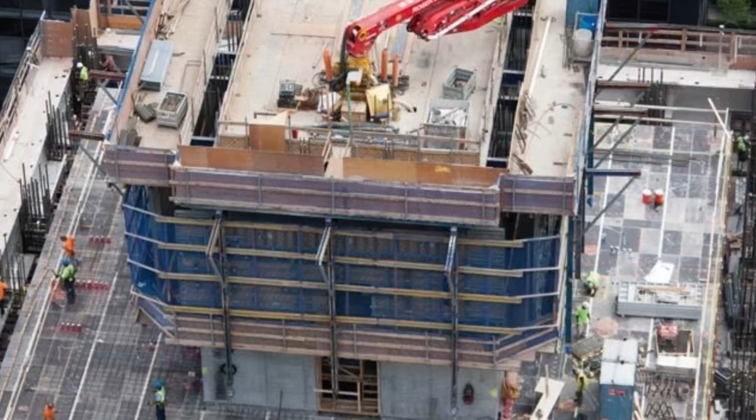Right now, more than 1,000 feet above 57th Street in Manhattan, there is a crack. Not a hairline, not the kind of cosmetic fracture that every concrete building develops as it settles into its first decade. According to a lawsuit filed in the New York State Supreme Court, there is a crack 10 inches deep inside the reinforced concrete core of the tallest residential building in the Western Hemisphere.

10 inches into the structural spine of the most expensive condominium ever built in New York City. A building that cost more than $3 billion. A building marketed as the building of the 21st century. A building where a single penthouse sold for nearly $88 million. And according to the people who live there, that building is failing from the inside out. This is the story of 432 Park Avenue.

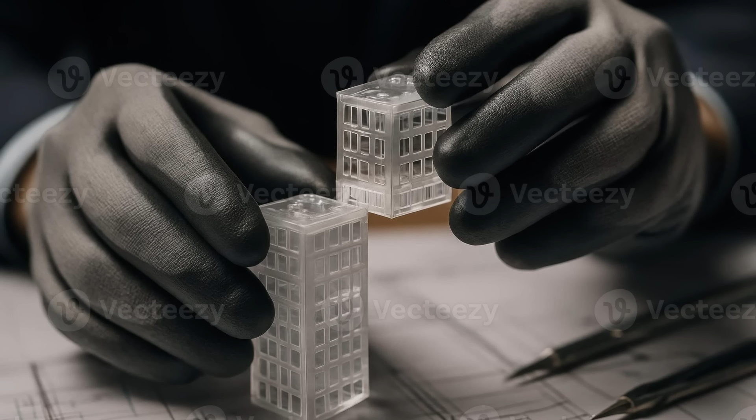It is a story about physics and money and ambition and the specific decisions that get made when a developer wants a building to look a certain way and the engineers tell him it cannot safely be built that way. It is a story with a dead architect, a foreclosed developer, a Saudi billionaire who has never spent a single night in the penthouse he bought, and a condo board that is now accusing the people who built their building of what their attorneys call a deliberate and far-reaching fraud.

It is a long story, and I'm going to tell you all of it, because the short version that has been circulating does not do justice to how this happened or to how many warnings were ignored along the way. Let me start with the ambition, because you cannot understand the failure without understanding what they were trying to do.

In 2011, a New York real estate developer named Harry Macklowe stood up at a global real estate conference and announced that he was going to build a monument. Macklowe is a legend in New York development. He is an old-school operator who takes enormous swings and does not deal in small gestures. His words, by multiple accounts, were that this would be the building of the 21st century, the way the Empire State Building was the building of the 20th. He was not selling apartments, he was selling a place in history.

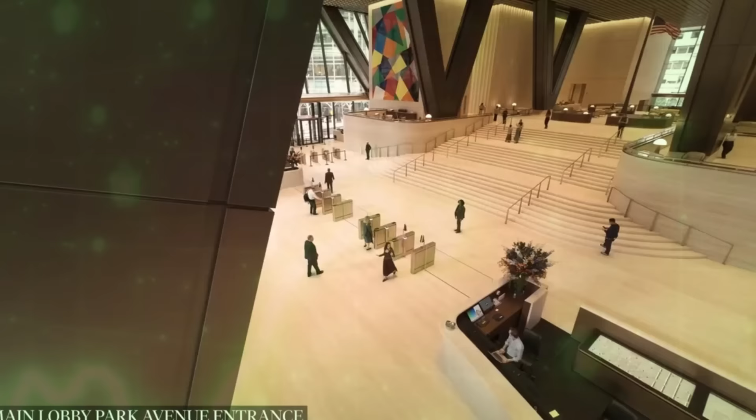The site was the old Drake Hotel on Park Avenue, which Macklowe had acquired in 2006 for around $413 million. To build his monument, he partnered with a Los Angeles-based investment firm called CIM Group, which had stepped in years earlier to help rescue Macklowe's position on the site.

And to design it, he hired one of the most celebrated architects alive, Rafael Viñoly, the Uruguayan-born designer behind the Tokyo International Forum and a string of internationally recognized buildings. The structural engineering went to WSP, the firm that helped invent the modern super tall skyscraper. On paper, this was the best team money could assemble.

The design Viñoly produced was famously inspired by a trash can, specifically a 1905 wastebasket designed by the Austrian designer Josef Hoffmann, which Viñoly reportedly kept on his desk. A perfect square grid, clean and repeating, scaled up into a tower. The most expensive residential building in the Western Hemisphere was modeled on a receptacle for garbage.

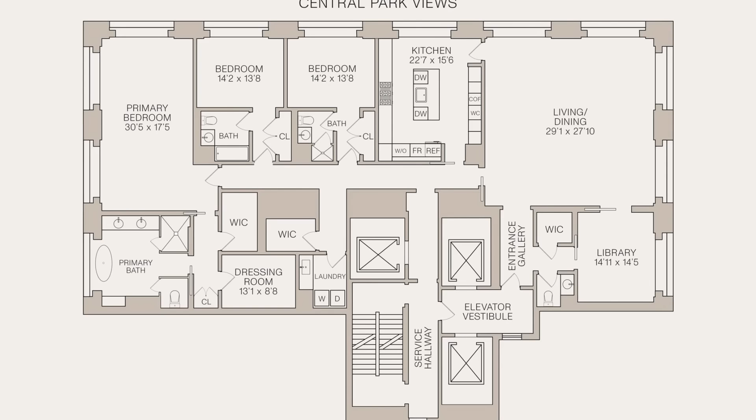I am not editorializing when I say that. It is in the public record of how the building was designed. And I personally think it is one of those details that seems like a small irony at the start of a story and then grows heavier as the story goes on.

Here is what they set out to build. A tower 1,396 feet tall, 96 stories, a footprint that is a perfect square, roughly 93 feet on each side. That produces a height-to-width ratio of about 15:1. I want you to sit with that number because it is the root of everything that follows.

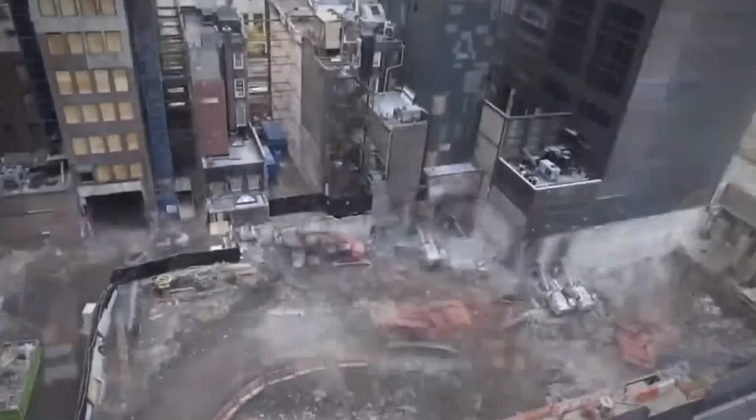Engineers classify a building as wind-sensitive when its height-to-width ratio crosses 5:1. 432 Park Avenue was designed at 3 times that threshold. When it topped out, it was the most slender super tall building on the planet. Picture a number 2 pencil balanced on its eraser, and then picture the wind blowing across the top of it. That is the physics problem the engineers were handed.

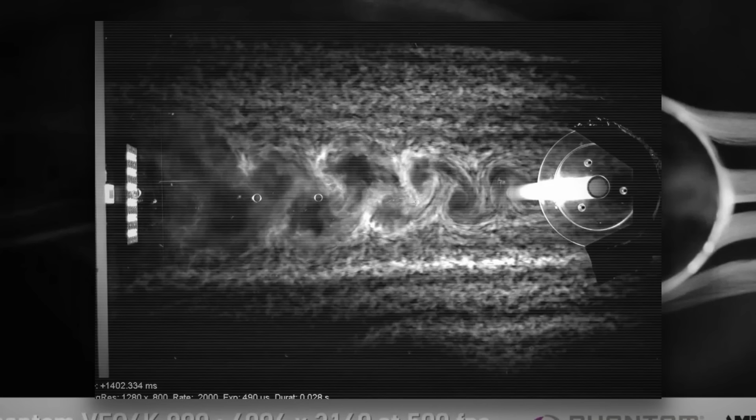The specific danger in a tower that's slender is not simply that the wind pushes it. It is a phenomenon called vortex shedding. When wind flows around a tall, slender structure, it does not just press against the face of the building and stop, it curls. It peels off the sides in alternating spinning eddies, first off one side, then the other, in a repeating rhythm. Engineers call that pattern a vortex street.

And here's the dangerous part. If the rhythm of that vortex shedding happens to match the natural frequency at which the building wants to sway, the two reinforce each other, and the tower begins to oscillate sideways, perpendicular to the wind, in a feedback loop that can grow far beyond what the raw wind speed would suggest.

The taller and thinner the building, the worse this problem becomes. For an office tower, some sway is tolerable because the workers go home at 6 o'clock. For a residential building, where people are trying to sleep, where they are trying to fill a bathtub, where they expect their doors to close, sway is a far bigger problem.

So Viñoly and WSP built a layered defense against the wind, and I want to walk through it, because the sophistication of the engineering is part of what makes the later failures so striking. First, they cut 5 open mechanical floors into the tower, each one spanning 2 stories, spaced roughly every 12 floors up the height of the building. These are the dark open gaps you can see from the street.

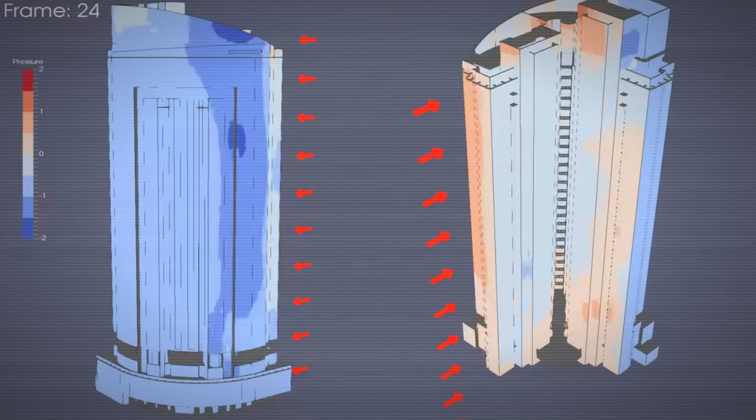The idea is that wind blows straight through those openings, like punching holes in the sail of a boat, disrupting the organized vortex street before it can build into a destructive rhythm. Second, at each of those mechanical levels, they installed outrigger trusses spanning 2 full stories, tying the central concrete core to the perimeter columns to stiffen the whole structure. Third, they wrapped the entire tower in a grid of white concrete columns, a kind of exoskeleton, spaced at regular intervals up the full height.

Fourth, they anchored the foundation with around 60 rock anchors driven 60 to 70 feet down into Manhattan bedrock. And fifth, at the very top, between floors 86 and 89, they installed 2 enormous tuned mass dampers, each weighing roughly 660 tons, designed to swing in opposition to the building's motion and cancel it out.

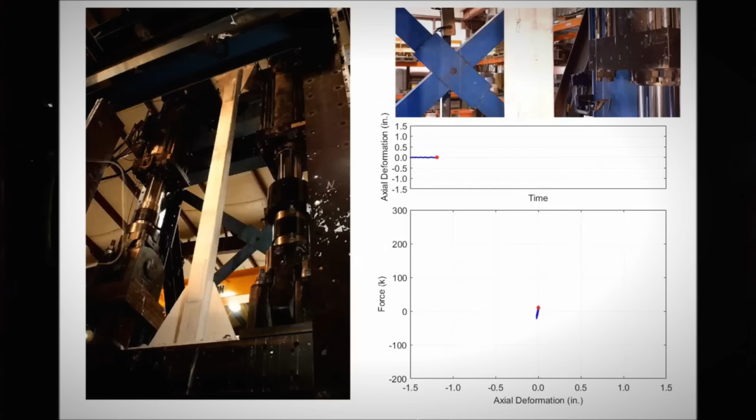At the center of all of it, holding the entire system together, is a 30-foot square reinforced concrete core, with walls roughly 30 inches thick at the base. That core is the spine of the building. It carries the wind loads. It resists the lateral forces. It is the single element in the entire structure that you cannot afford to compromise. Because if the spine fails, every other system fails with it. And that spine, according to the April 2025 lawsuit, is exactly where the 10-inch crack is now located.

The materials were as extreme as the geometry. According to the engineering record, the project used around 70,000 cubic yards of concrete and 12,500 tons of reinforcing steel. The lower 38 stories were poured with concrete rated at 14,000 pounds per square inch, roughly twice the strength of a typical high-rise mix, strong enough in engineering terms to support a small mountain.

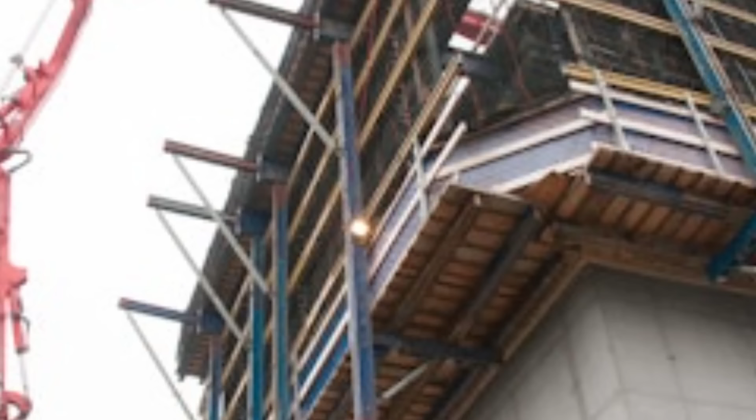And for the exterior, the team developed a specialized white Portland cement, chosen specifically for its color, for the way it would stand out clean and pale against the glass towers of Midtown. The structural engineers would later describe producing that high-strength, pumpable white concrete, capable of being pushed up nearly 1,400 feet without separating or discoloring, as one of the most demanding challenges of the entire project.

And this is where I have to pause, because this is the hinge of the entire story. The white concrete was the signature. It was the brand. It was the thing that made 432 Park look like 432 Park. And according to the lawsuit, protecting that white concrete, keeping it pure and visible, drove a series of decisions that the residents now say doomed the building.

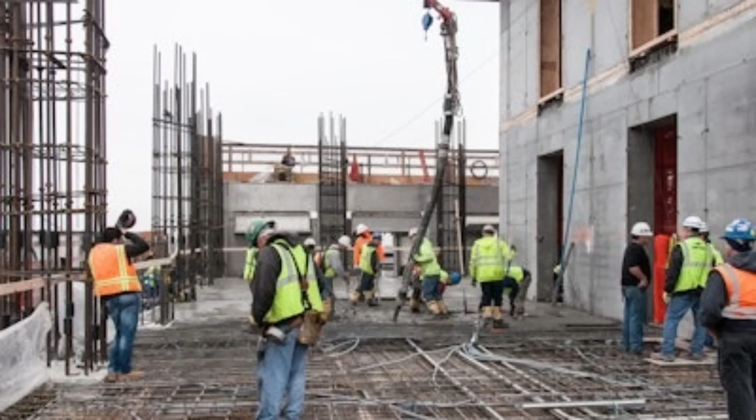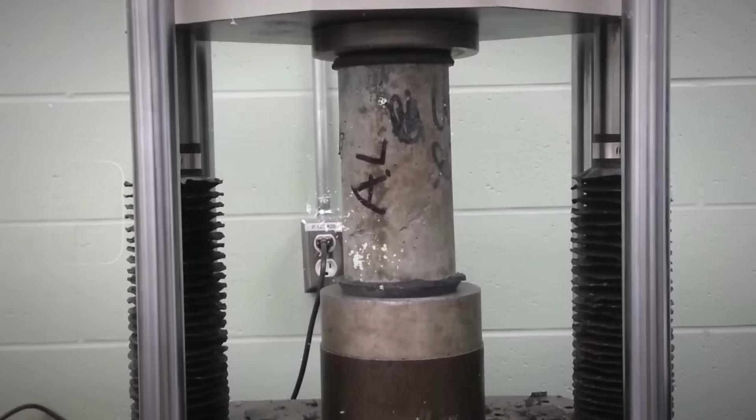But let me keep building the timeline first, because the warnings, according to the complaint, started before they poured a single floor. Construction began in earnest on the Drake Hotel site around 2012. The main contractor was Lend-Lease. The challenge they faced had genuinely never been solved at this scale. How do you pour tens of thousands of cubic yards of specialized white concrete into a 1,396-foot tower on a cramped Manhattan lot on a tight schedule while keeping the color consistent and the strength intact all the way up?

The answer was a self-climbing concrete core system, a pouring apparatus with a placing boom and a crane that hydraulically lifted itself about 16 feet at a time as each floor was completed. Floor by floor, the tower rose at what observers at the time described as unusual speed.

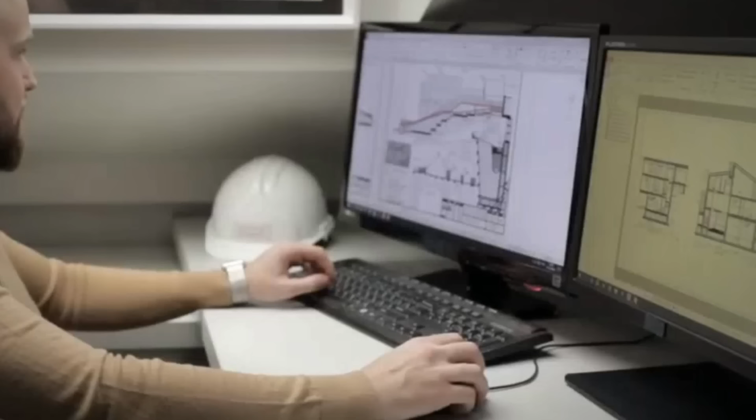According to the 2025 complaint, the problem with the beautiful white concrete was durability. The engineers, the lawsuit says, wanted to add a standard ingredient called fly ash to the concrete mix. Fly ash makes concrete significantly more durable and more resistant to cracking over time. It is not exotic.

It is used in concrete construction across the world. But fly ash, according to the complaint, would have made the concrete slightly darker. It would have compromised the pure white color that was the building's entire aesthetic identity. And so, the lawsuit alleges, the request to add fly ash was refused.

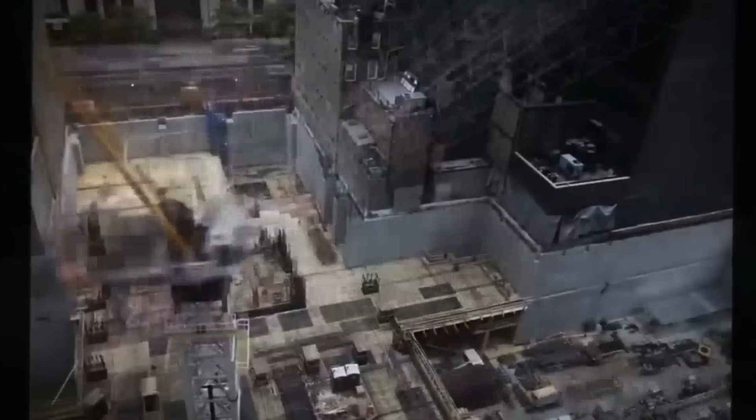The competitor coverage of this story has circulated a quote attributed to a structural engineer summarizing the choice in 3 words: color or cracks. I want to be careful here because I have not been able to independently verify that specific internal email in the primary court record available to me. So I am presenting it as what has been reported and alleged, not as established fact. But the broader allegation that durability was traded for appearance is at the center of the lawsuit the condo board actually filed. The engineers, according to the complaint, then proposed a backup plan.

If they could not put fly ash in the concrete, they could coat the exterior with a thick, flexible elastomeric membrane, a waterproofing layer designed to seal any cracks that developed and block water from reaching the steel reinforcement inside the concrete. And here's the allegation that has become the headline of this entire story. According to the lawsuit, the developer rejected the elastomeric coating because an opaque coating would alter the appearance of the white concrete and reduce the building's appeal to the world's wealthiest buyers.

Instead, according to the complaint, the facade received a clear silicone sealant, the same kind of material the lawsuit alleges was used to protect the hull of a yacht, a clear coating, so the white concrete could still show through. The look of the building, the complaint argues, was chosen over the protection of the building. I personally think this is the decision the entire case turns on if the allegations hold up in court, because everything downstream flows from water getting into concrete that was not adequately protected against it.

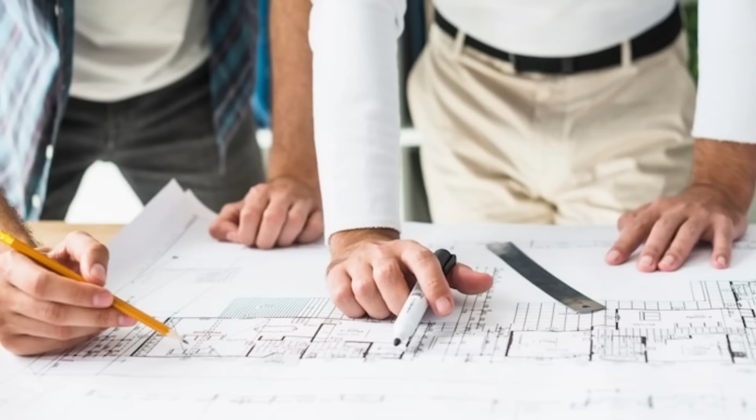And I want to be precise about something the careful coverage of this story gets right and the sloppy coverage gets wrong. There are actually 2 separate problems here. One is the cracking of the exterior white concrete facade, which is what the fly ash and the coating decisions were about. The other is the 10-inch crack later alleged in the building's structural core, which is a deeper and more serious matter. Both are real allegations in the case. Only the facade cracking was, according to the complaint, the subject of warnings before construction. I'm not going to blur those 2 together the way some retellings have, because the distinction matters.

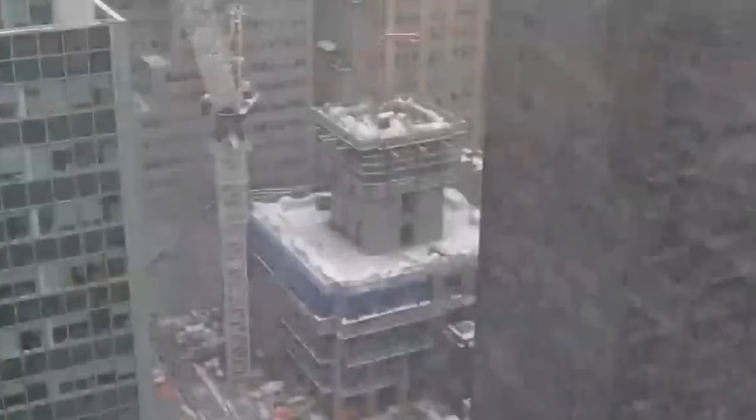The tower topped out in October of 2014. It was certified complete in December of 2015. The first residents began moving in almost immediately, and almost immediately, according to the residents, the building began telling a very different story than the one in the marketing. And the marketing, I should say, was extraordinary. Macklowe reportedly spent around $1 million to commission a 4-minute promotional film from an Emmy-recognized production company.

The centerpiece of the film was Philippe Petit, the high-wire artist famous for walking a tightrope between the Twin Towers in 1974, now depicted walking a virtual wire from the Empire State Building directly to 432 Park Avenue. The torch symbolically being passed from the building of the 20th century to the building of the 21st. It was abstract, it was artful, and by every financial measure, it worked.

By 2014, before construction was even finished, half the units had sold for a combined $1 billion. By 2015, the building was 90% sold. The cheapest unit in the entire tower still cost more than $1 million. 432 Park became briefly the first condominium building in New York City history to cross $2 billion in sales. The projected total sellout was $3.1 billion, and by the developer's own reported accounting, the partnership cleared somewhere around $900 million in profit. The buyers were exactly who you would expect.

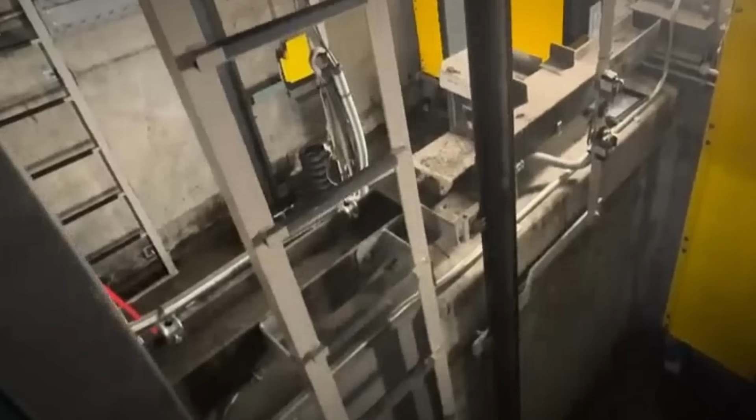Because the failures, when they came, came fast. The first sales had barely closed when the water started. On November 5th, 2017, according to the record, a catastrophic flood tore through the building between the 83rd and the 86th floors. A buyer named Juan Beckmann Vidal, the chairman of the company behind the Jose Cuervo tequila brand and a member of one of Mexico's wealthiest families, had been in contract for an apartment priced at $46.25 million on the 86th floor. After the flooding, he sued to get his deposit back. That dispute was reportedly settled quietly about a year later.

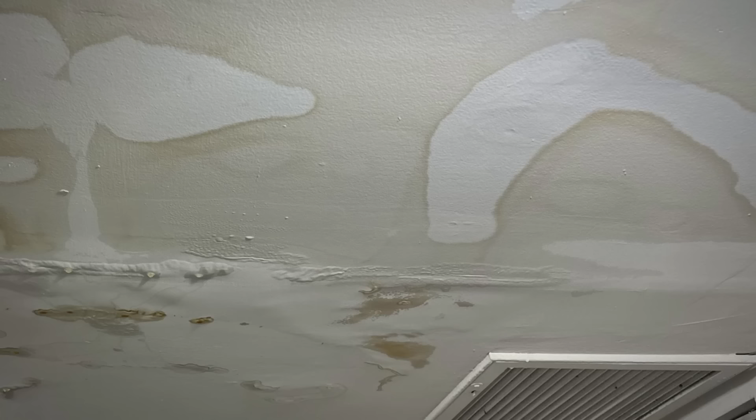The leaks did not stop. In late November 2018, 2 major water failures happened within 4 days of each other. A flange burst on the 60th floor on November 22nd, and a water line failed on the 74th floor on November 26th. Water poured down 2 of the 4 residential elevator shafts. According to the record, total water damage in 2018 alone reached $9.7 million. 35 apartments were damaged by leaks. An elevator was out of service for weeks. And the building's insurance premiums, according to the residents, rose 300% over 2 years.

By 2019, the residents were holding owners' meetings, and the minutes from those meetings began to read like dispatches from a haunted ship. Creaking, banging, clicking, metal partitions groaning as the building moved in the wind, a whistle in the door frames and the elevator shafts, which residents described as constant. Pipes inside the walls, according to the complaints, vibrated so violently when the tower swayed that bathtubs became effectively unusable because the water would not sit still.

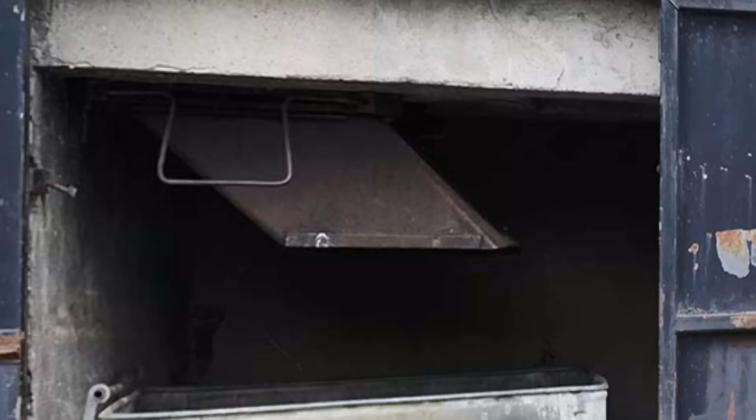And then there is the detail that, more than any other, captured the public imagination. The trash chute. 432 Park Avenue's garbage chute is a straight vertical drop of roughly 1,300 feet, with no brakes and no offsets to slow anything down. When a resident on a high floor drops a bag of trash into it, that bag accelerates the entire way down. And by the time it reaches the bottom, it is moving at something approaching terminal velocity.

According to the board meeting minutes, residents reported the impact vibrating through the walls of their bedrooms, a sound they described as a bomb going off inside the building, on a schedule, every single time someone took out the garbage. Imagine paying $20 million for an apartment in the most exclusive tower in New York and being woken by what sounds like an explosion every time a neighbor throws away a milk carton.

Then came Halloween night, October 31st, 2019. The wind picked up over Manhattan. A resident stepped into one of the building's residential elevators. The system, as it is designed to do in high wind, slowed the car, and then it stopped. That resident sat trapped inside the elevator car, somewhere in the sky above 57th Street, for 1 hour and 25 minutes. The cause, according to reporting, traced back to the building's movement in the wind exceeding what the elevator system could comfortably absorb.

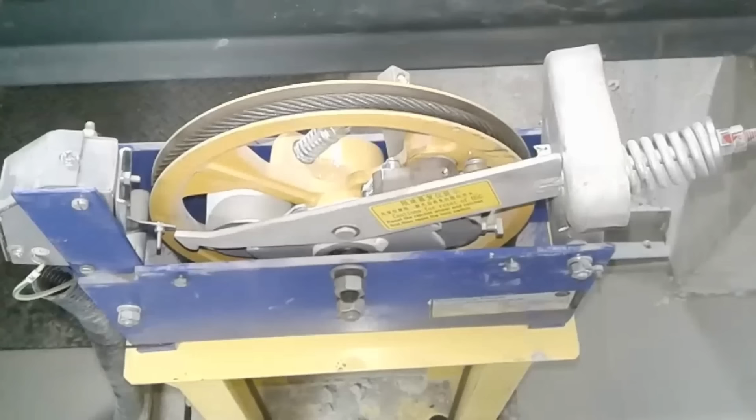In June of 2021, there was an electrical explosion, an arc flash in a mechanical room. According to reporting, a contractor working on a leak had drilled into live wiring and was thrown by the blast. It was, by the residents' account, the second such explosion in 3 years.

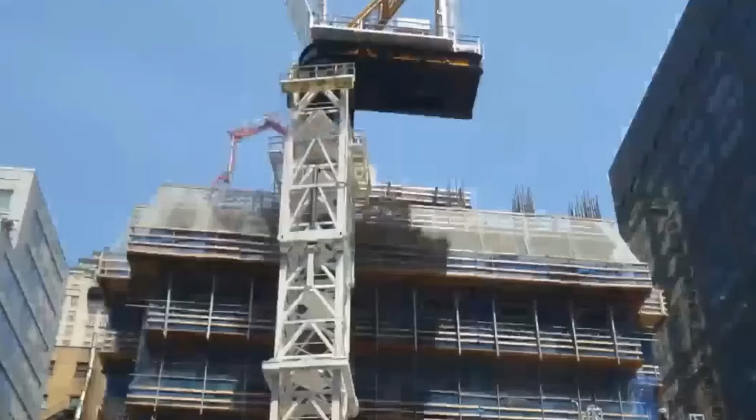The complaint included a line that has been widely quoted that the situation represented one of the worst examples of sponsor malfeasance in the development of a luxury condominium in the history of New York City. According to the residents, the chairman of CIM Group had even privately acknowledged that the noise and vibration inside the tower were, in his word, intolerable.

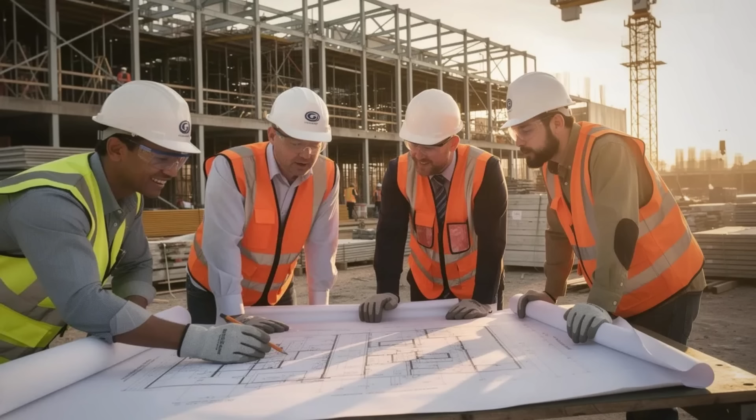The developers rejected the lawsuit forcefully. They called it ill-advised. They described 432 Park as a treasure and characterized the building as containing a sophisticated symphony of systems that simply needed fine-tuning as residents settled in. They said they had attempted to do further work but had been denied access to the building by the board. And notably, the developers argued that the lawsuit was not even supported by all the residents.

Macklowe himself reportedly described the board's lawsuit as a scorpion biting its own back because, in his view, publicizing the building's problems was destroying the value of the very units the residents were trying to protect. That first lawsuit did not resolve cleanly. It ground forward through the courts for years. By 2024, according to public reporting, it had produced more than 4 million pages of documents and dozens of days of deposition testimony.

The fight became a finger-pointing exercise among the developer, the general contractor Lendlease, the engineering firm, the architect, and the various subcontractors, each pointing at the others, with the sponsor's liability shielded behind the limited liability company structure that developers use precisely for situations like this.

And while that litigation dragged on, the developer's own personal fortunes inside the building collapsed in a way that reads almost like a parable. In 2022, Harry Macklowe purchased 3 units in his own building, on the 78th and 28th floors, for around $47 million. The financing for that purchase, according to reporting, came in the form of more than $46 million in loans from his own co-developer, CIM Group.

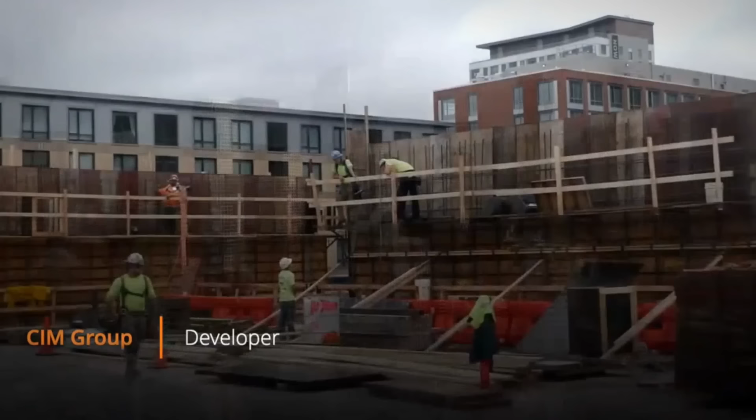In March of 2023, Rafael Viñoly died. He was 78 years old. He died before the second and far more serious lawsuit was filed, which means the architect of the building never had to answer in a courtroom for any of what came out afterward. I want to note, because it is fair to note, that Viñoly's defenders point out that many of the most damaging decisions alleged in the case were developer decisions, not architect decisions, and that the tension between Viñoly and Macklowe over design choices was well documented while the architect was alive.

Viñoly was also no stranger to signature buildings producing unintended consequences. His Walkie-Talkie tower in London, with its concave glass facade, focused sunlight intensely enough to damage cars parked on the street below, and channeled wind strong enough to knock pedestrians off their feet. He publicly acknowledged that his team had made mistakes on that project. The pattern, his critics argue, was consistent. A bold signature shape is chosen, physics objects, and eventually the people using the building pay the price.

Then, in April of 2025, the condo board filed its second lawsuit. And this one was bigger, and the language was far heavier. The 2025 complaint runs 46 pages. It seeks $165 million in damages, and it uses a phrase the first lawsuit did not: deliberate and far-reaching fraud. The core allegation of the second lawsuit is not merely that the building was poorly built, it is that the developers knew it was defective and concealed that knowledge in order to keep selling units at top prices.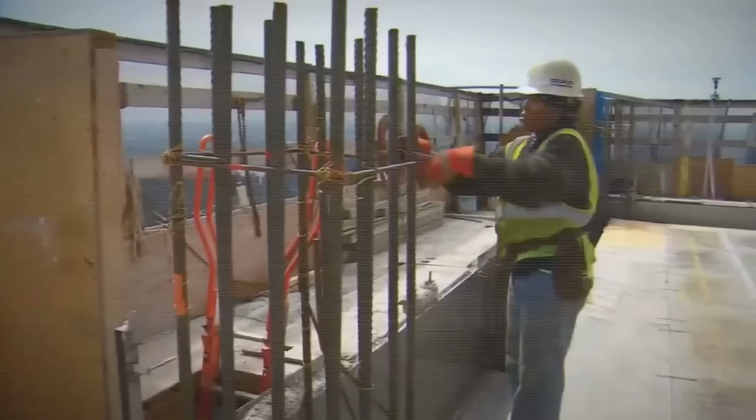According to the complaint, a facade survey conducted in 2016, while the building was still actively being sold, identified 1,893 defects in the exterior, more than half of which were classified as life safety items. That report, the lawsuit alleges, was concealed from buyers who were signing contracts at the same time.

The complaint goes further. According to CNN's reporting on the filing, the lawsuit alleges that the architecture firm SLCE made materially false claims in the building's offering plan, the legal disclosure document that buyers review before purchasing. The complaint cites a specific change in the document's wording. Language that originally stated the concrete will prevent water penetration was allegedly changed to say it was designed to prevent water penetration.

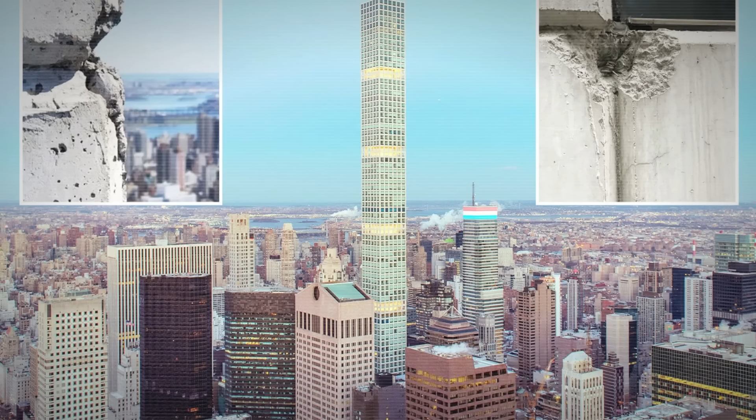One word, will, changed to "designed to." In legal terms, the lawsuit argues that is the difference between a guarantee and a hope, and the change was allegedly made because the developers already knew the facade could not deliver the guarantee.

The complaint also alleges that the contractor and the engineering firm sent a letter to the New York City Department of Buildings that misrepresented the nature, extent, and type of the cracking, allegedly omitting the most damaging findings of their own internal survey, while people were still buying and moving into the building. And at the center of all of it is the 10-inch crack.

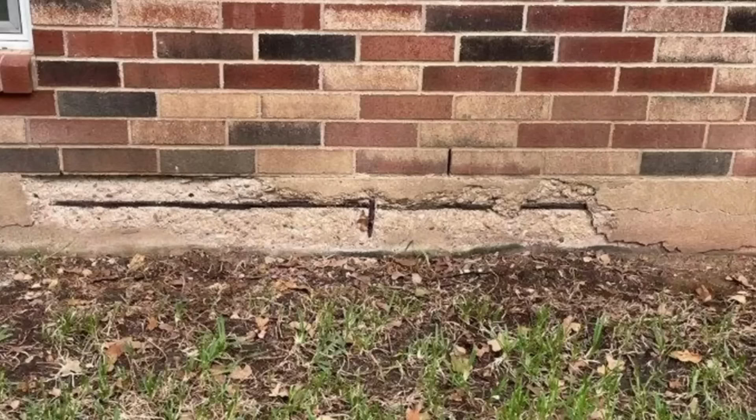According to the 2025 complaint, the facade's defective design left it plagued with thousands of severe cracks, spalling, and deterioration, which led to major water infiltration and flooding, and, critically, to corrosion of the steel rebar reinforcing the concrete columns. I read you the exact substance of that allegation because it is the heart of the structural concern.

When water reaches the steel reinforcement inside concrete, the steel begins to rust. When steel rusts, it expands, sometimes to several times its original volume. That expansion cracks the surrounding concrete from the inside out. The new cracks admit more water. The additional water corrodes more steel. The process feeds on itself, and it does not stabilize, and it does not reverse on its own.

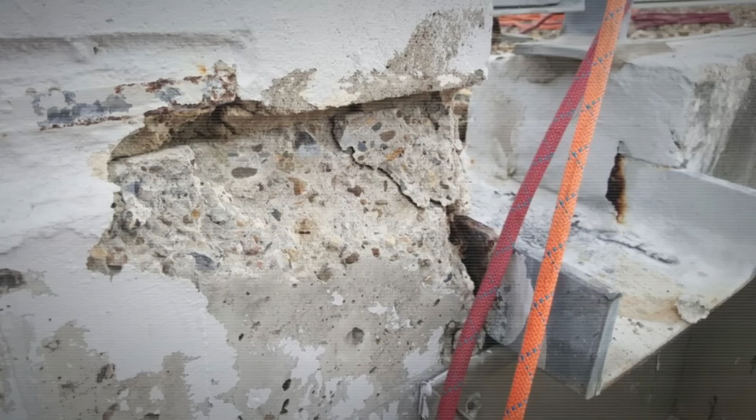The complaint alleges that this process is now underway inside the structural columns of the building, and that somewhere inside the core, the spine that holds the entire 1,396-foot tower upright against the wind, there is a crack 10 inches deep. The developers deny all of it.

CIM Group, in a statement to multiple outlets, said it vehemently denies the claim and will be moving to dismiss the complaint. The developers have previously characterized the residents' allegations as exaggerated. As of the most recent public record, the case is pending, it has not been ruled on, and these allegations have not been tested in court.

I want to be completely clear about that because it matters. This is a lawsuit, not a verdict. What I have described is what the condo board alleges, supported by the survey documents and the offering plan language their attorneys have cited. The other side is entitled to its defense, and it has stated its defense plainly.

Now, I want to turn to the part of this story that I think gets too little attention, which is what it has actually been like to live there, and what the money has done. In 2021, the New York Times reporter Stefanos Chen broke the definitive account of the residents' experience.

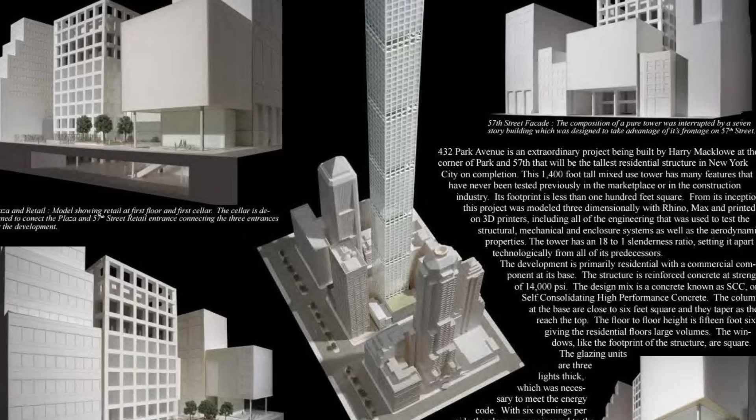A woman named Sarina Abramovich, who had paid $17 million for her unit in 2016, told him that she had been convinced it would be the best building in New York, that the developers were still billing it as a gift to the world, and that it was not. She told him that everybody in the building hated each other. She told him that if she had known then what she knew now, she would never have bought.

And she said one sentence that I think captures the entire story better than any engineering report could. Everything here, she said, was camouflage. The financial wreckage tells the same story in numbers. Thomas Peterffy sold his 84th floor unit in 2024 for $13.5 million, a substantial loss on what he had paid.

A unit on the 79th floor, originally listed at $135 million, was cut to $92 million in 2023 and finally sold that October for $65.6 million, less than half its original asking price. And the penthouse, the $87.7 million trophy on the 96th floor that Fawaz Al-Hokair bought in 2016 and reportedly never spent a night in, became the symbol of the whole collapse.

He listed it in 2021 for $169 million, aiming to nearly double his money in the post-pandemic luxury boom and set a city record. It did not sell. He cut it to $130 million in 2023. He cut it again to $105 million in 2024.

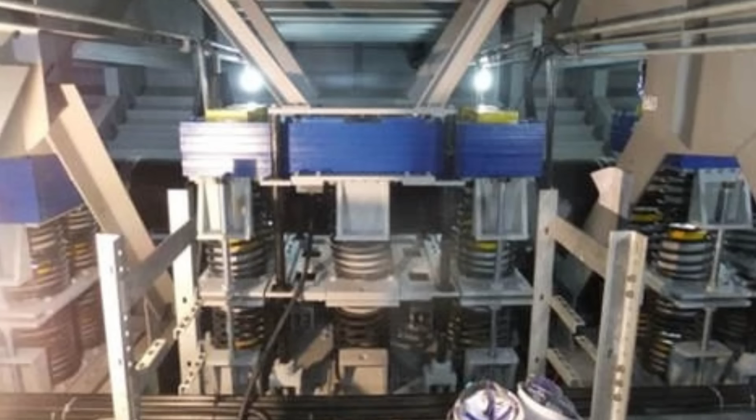According to estimates cited in the reporting, refurbishing the two 660-ton tuned mass dampers at the top of the tower, the counterweights that are the only thing keeping the building's sway within livable limits, could cost on the order of $100 million on its own. The facade remediation has been estimated in similar territory.

For a building not yet 10 years old, the repair bills run into the hundreds of millions of dollars on top of the litigation, which reportedly consumes millions of dollars a year in legal fees on its own.

There is a building in downtown San Francisco where, if you set a marble down on the floor of certain apartments, it will roll on its own. Not because the floor was built wrong, but because the entire building is tilting. The Millennium Tower at 301 Mission Street is 645 feet tall, 58 stories, and home to 419 luxury condominiums that once sold for as much as $10 million each. It opened in 2009 as the most prestigious residential address in the city.

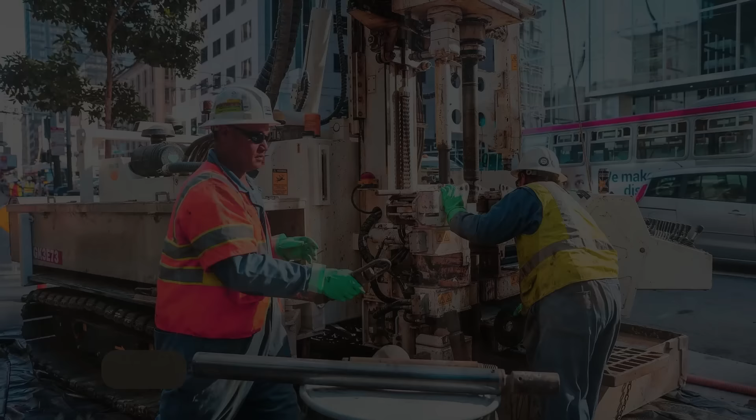And almost from the moment it opened, it began sinking into the ground beneath it and leaning slowly and relentlessly toward the northwest. As of the most recent monitoring data, the top of the tower leans about 29 inches off true. A $120 million engineering rescue was supposed to stop the sinking and pull the building back towards straight. The sinking, by the engineers' own account, has finally been arrested, but the tilt that the same engineers predicted they would correct by 4 inches has so far come back by about 1 inch.

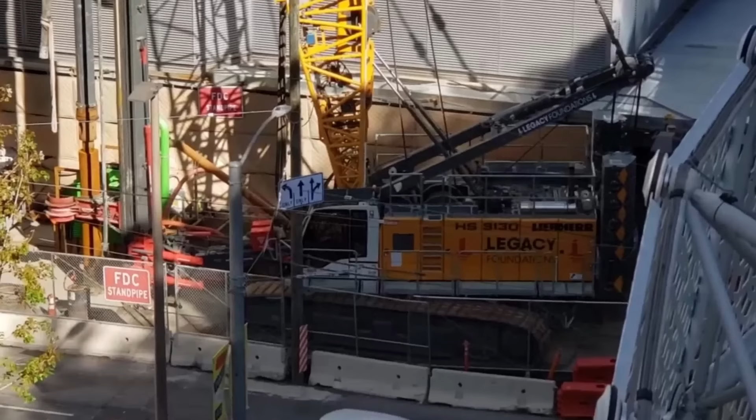This is the story of how the most expensive residential tower San Francisco had ever built became the city's most expensive engineering embarrassment. How a foundation decision made to save time and money in 2005 produced a problem that could not be undone, and how the fix for that problem ran into trouble of its own. It is a story about the ground we build on, about what engineers can and cannot predict, and about the gap between a building that is technically safe and a building that anyone actually wants to live in.

This is document number 1. The Millennium Tower file is open. To understand what happened to this building, you have to understand what is underneath it, because the entire story begins below the street. 301 Mission Street sits in San Francisco's South of Market District on land that 2 centuries ago was part of the bay itself.

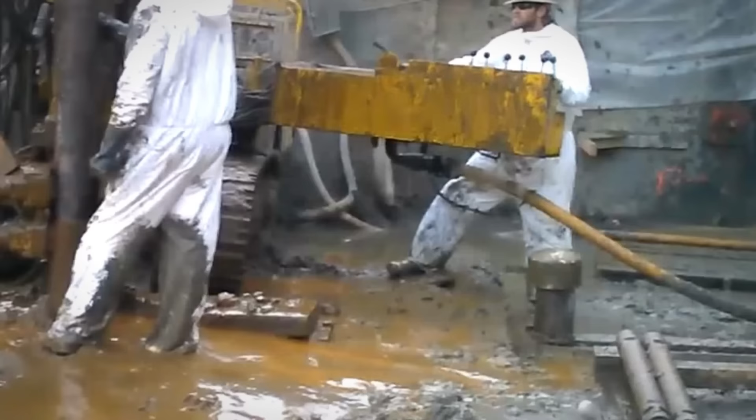It is reclaimed shoreline. If you drill down through the foundation, you pass through layers, in order. First, artificial fill, the loose material dumped to create the land in the city's early days. Then a layer of soft, compressible marine clay that geologists call Young Bay mud, then a denser layer of sand known as the Colma Formation, then a stiff but still compressing layer called Old Bay clay, and finally, around 200 feet down, the actual bedrock of the Franciscan complex.

Here is the single most important fact in the entire story. Almost every super tall building in San Francisco is anchored into that bedrock. The Salesforce Tower 2 blocks away sits on piles driven the full 200 feet down to rock. So do the other major towers in the financial district. The Millennium Tower does not.

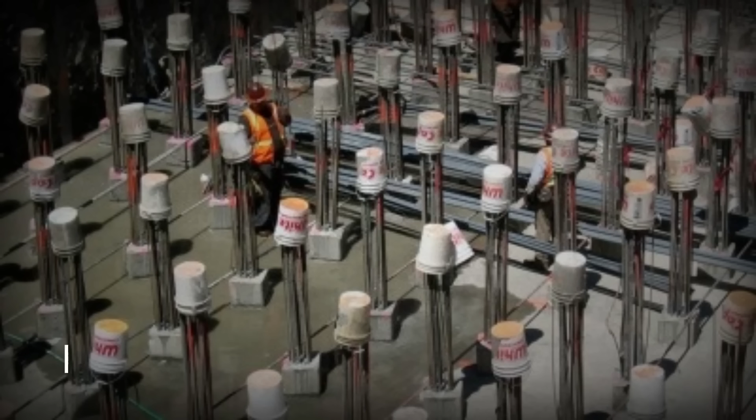When the developer, an entity tied to Millennium Partners, broke ground in the mid-2000s, the foundation they built was a roughly 10-foot thick concrete mat resting on around 950 reinforced concrete friction piles. Those piles went down 60 to 90 feet, and they stopped in the Colma sand. They did not reach bedrock.

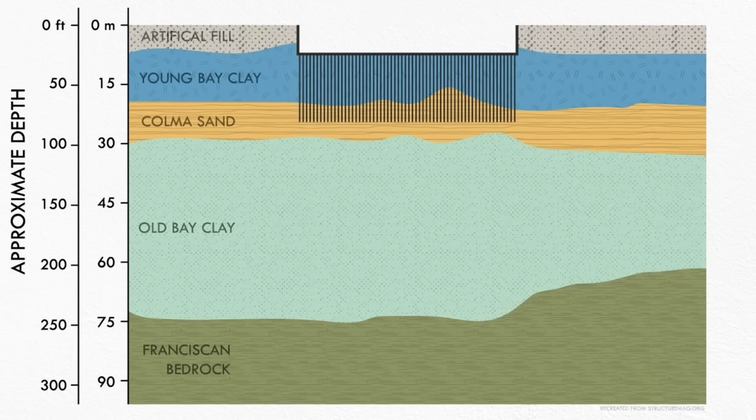Now, a friction pile is not inherently a mistake. It does not work by standing on a hard layer the way a bedrock pile does. It works by gripping the soil along its entire length, using friction between the concrete and the surrounding earth to hold the building up. Done with the right calculations in the right ground, friction piles work fine, and they are cheaper and faster than drilling all the way to rock.

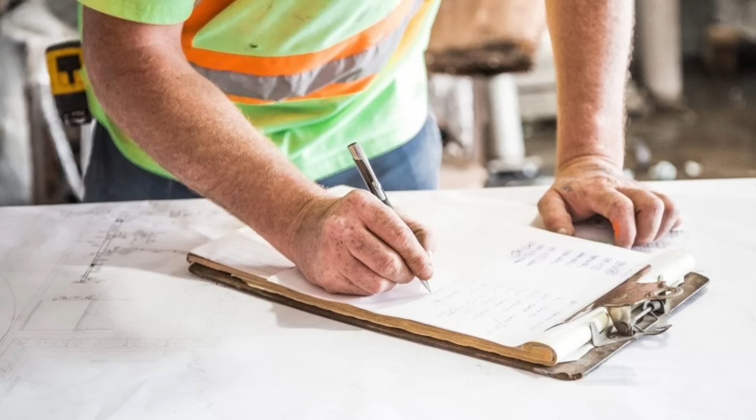The design team's models projected that the building would settle about 5.5 inches over its lifetime, with the bulk of that settlement coming from the deep Old Bay clay layer slowly compressing. 5.5 inches by the year 2028. That was the prediction. That was the number everyone signed off on.

There was one factor those models underweighted: the sheer weight of the building. The Millennium Tower was built primarily of reinforced concrete rather than the lighter steel framing that most San Francisco high-rises use. Concrete is heavier.

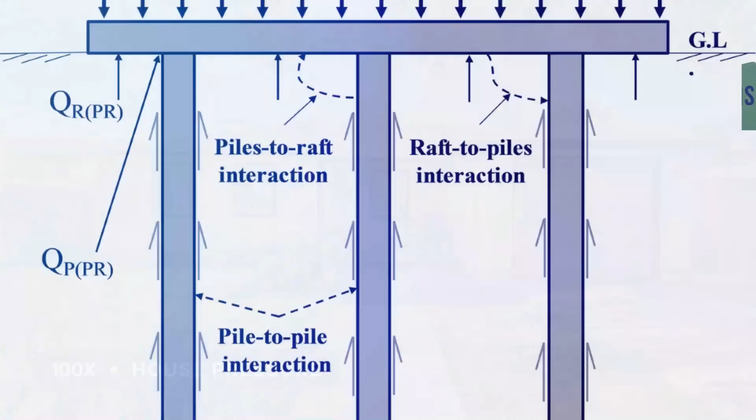According to the engineering accounts, the finished tower imposed something on the order of 11,000 pounds per square foot on its foundation, roughly 100 times the pressure a typical single-story house places on the ground. That enormous load sat on friction piles, which sat in sand, which sat on top of a still compressing clay layer, which sat on reclaimed bay mud. And the heavier the load on that clay, the faster it would squeeze, like water being pressed out of a sponge.

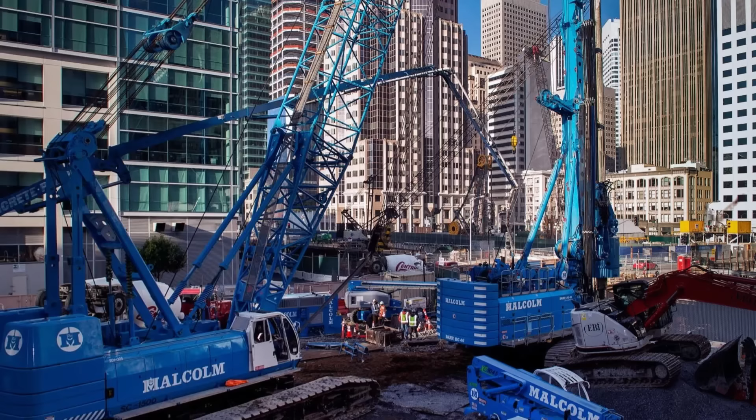I want to pause here because I think the foundation decision is where the moral weight of this story actually sits, and I want to know what you think about it before we go any further. The engineers who chose friction piles were not incompetent. Under the assumptions available in 2005, the choice was defensible. Going to bedrock would have been slower and more expensive, and nobody likes to pay for a margin of safety they have been told they do not need.

So here is my honest question for you, and I genuinely want your answer in the comments as we go. When a building like this fails, is that a failure of the engineers who ran the numbers, a failure of the developer who wanted it built cheaper and faster, or a failure of a system that lets people build 645-foot towers on reclaimed mud without requiring them to reach bedrock? Hold your answer. I'm going to come back to it.

Because the sinking started immediately. By the time the building opened in 2009, it was already settling faster than the models had predicted. And then a second factor entered the story. Between roughly 2010 and 2014, construction began on the Transbay Transit Center, a massive new transportation hub less than 100 feet away. That project required digging an enormous pit and pumping huge volumes of groundwater out of the surrounding soil to keep the excavation dry.

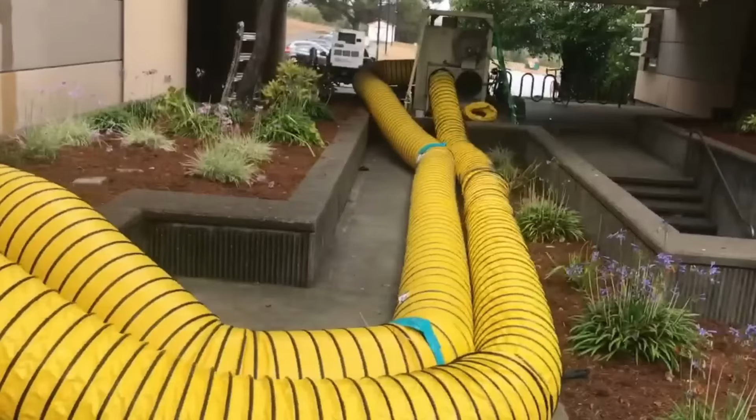When you pull water out of the ground like that, you increase the effective stress on the clay layers underneath, and you accelerate exactly the kind of consolidation that was already squeezing the Millennium Tower's foundation. The developer would later argue that this dewatering next door was the real cause of the excessive settlement. The Transbay Authority would counter that the tower had already sunk around 10 inches before their below-grade work even started. Both of those claims, as we will see, ended up in court.

By 2014, residents on the upper floors started noticing things they could not quite explain. Doors that would not close because the frames were no longer square. Hairline cracks at the corners of the drywall. Window frames that seemed slightly off. Vertical lines inside the apartments, the edges of door frames, window mullions, the lines of cabinetry that no longer matched the verticals of the city outside the glass. Some residents reported the building creaking during temperature swings.

Down in the parking levels in the basement, walls showed their own fractures, and at least one couple described finding water that appeared to be seeping through the concrete and chunks of wall that had crumbled away in a building that was at that point only about 7 years old. And on the 6th floor, an attorney and homeowner named Jerry Dodson, who had become one of the central figures in the entire saga, started paying very close attention.

Dodson is the man who would later become famous for a single demonstration, setting a marble down on the floor of his unit and filming it roll, on its own, toward the northwest, toward Fremont Street. That marble became the most powerful piece of evidence in the entire story because you did not need to be an engineer to understand it.

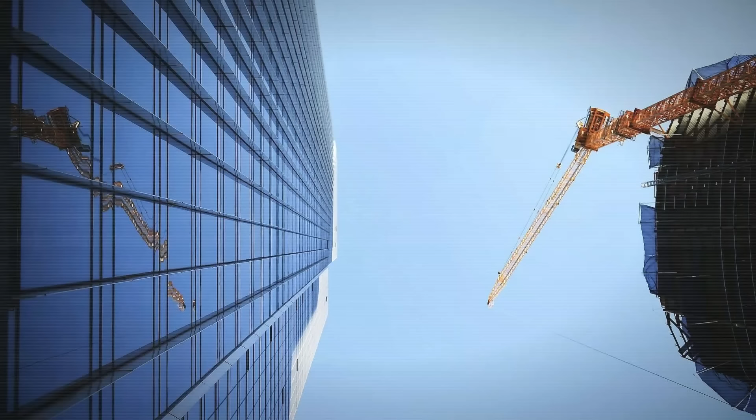It is worth pausing on who actually lived in this building because it shapes how the story played in the press. The Millennium Tower was not anonymous luxury. It was marketed by Millennium Partners as the most exclusive address in San Francisco, with a private club lounge, a wine cellar, a spa, valet parking, and interiors by a celebrated design firm. The former San Francisco 49ers quarterback Joe Montana owned a unit. The venture capitalist Tom Perkins built out a penthouse. Hedge fund principals, tech executives, and professional athletes filled the upper floors.

These were people with options who chose this tower and who are now watching the value of their choice collapse in public. When a building full of the wealthy and the connected starts sinking, it does not stay quiet for long. The story broke into public view on August 2nd, 2016, when the NBC Bay Area Investigative Unit, led by reporter Jaxon Van Derbeken, who has stayed on this story for the better part of a decade, reported that the building had sunk about 16 inches and was tilting toward the northwest. 16 inches, against a lifetime prediction of 5.5.

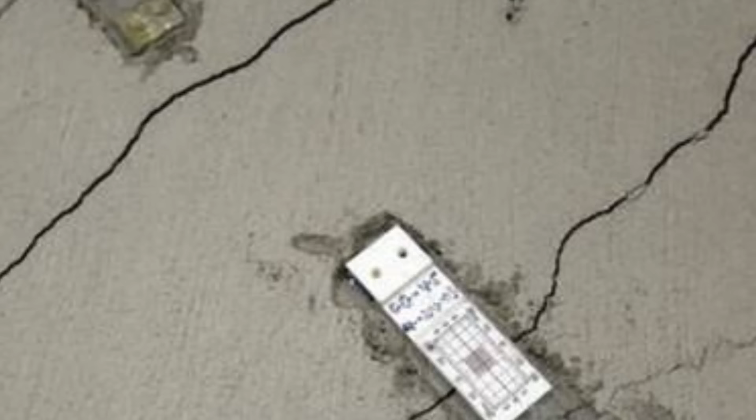The building had blown through its entire projected lifetime settlement 3 times over in about 7 years. And the worst part was not the sinking itself. It was that the sinking was uneven. The northwest corner had gone down further than the rest, and that differential settlement is what produced the lean. A building can sink straight down a foot and be perfectly fine. It is when one corner drops faster than the others that you get a tower leaning over a financial district.

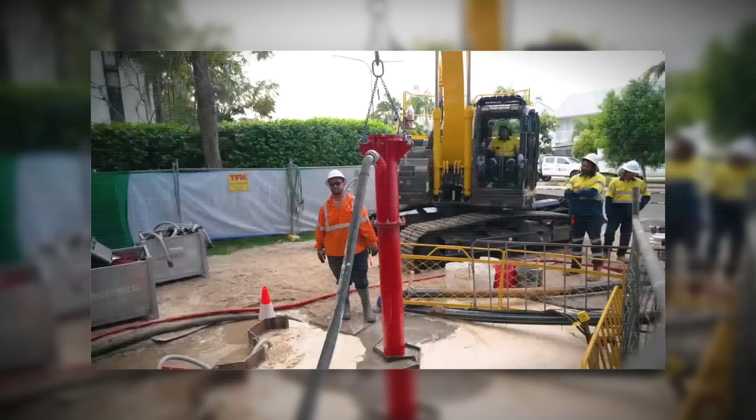In the middle of all of it were the residents, people who had paid $2 million, $5 million, $10 million for what they believed was the most solid address in the city, who now owned apartments in a building that was on the national news as the Leaning Tower of San Francisco. The property values reflect the verdict the market reached almost instantly. We will come back to those numbers because they are brutal, but first I want to walk through the city's safety question because it matters and because it is the part most people get wrong.

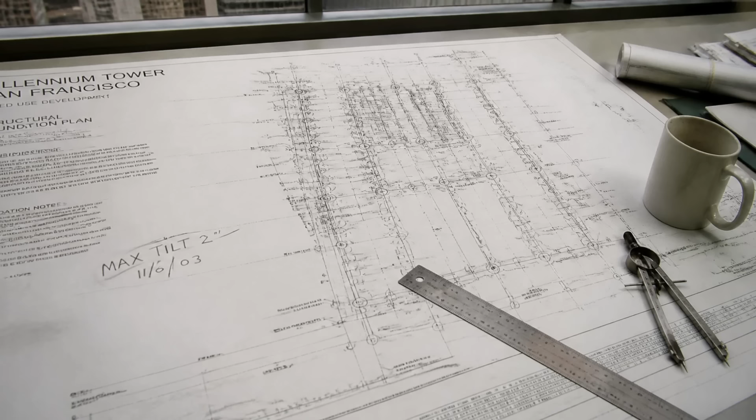With the building in the headlines, the city commissioned a panel of independent experts to assess whether the Millennium Tower was actually dangerous. Was it at risk of falling? Were the residents in danger, both in everyday use and in the event of a major earthquake, which in San Francisco is not a hypothetical? The panel's conclusion, which has been reaffirmed repeatedly since, was that the building was structurally safe. The settlement had not compromised its ability to withstand a strong earthquake. It was not going to fall over.

I want to be completely clear about that because the dramatic retellings of this story often blur it. By every engineering assessment from the city and from the building's own engineers, the Millennium Tower's structural integrity was never actually in question. What was in question was its tilt, its continued movement, its serviceability, and its value. A building can be entirely safe to occupy and still be a financial catastrophe and an engineering embarrassment. The Millennium Tower is the proof.

But safe or not, something had to be done because the building had not stopped moving. By the time the expert panel did its work, the tower had settled further and was out of plumb by more than a foot. It was at points tilting at a rate of around 3 inches per year and sinking around half an inch per year.

Left alone, the engineers warned, it could eventually reach a lean where the elevators and the plumbing would stop functioning, the threshold for which has been described as around 40 inches of tilt. At that point, the building becomes uninhabitable, not because it is unsafe, but because you cannot run an elevator or drain a pipe in a tower that is leaning too far. The clock was running.

Now, I want to put the tilt in perspective, because the phrase leaning tower conjures an image that is more dramatic than the reality, and being honest about that is part of doing this properly. The most famous leaning building in the world, the Leaning Tower of Pisa, at its worst, leaned about 5 degrees, before it was stabilized down to closer to 4.

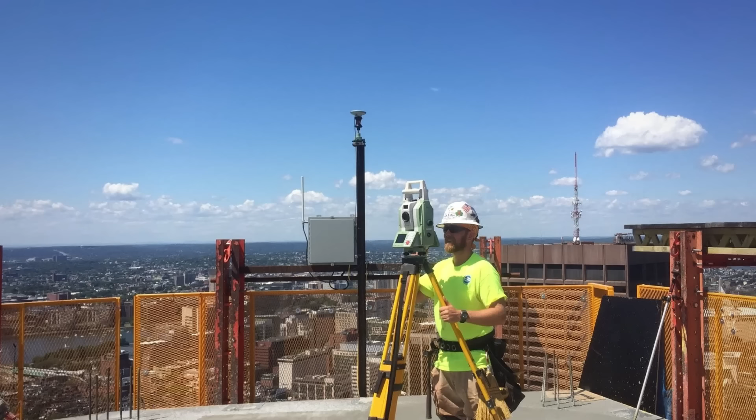If the Millennium Tower were leaning that badly, the top would be displaced by something like 13 meters, dozens of feet, and it would be obvious to anyone standing on the street. It is not. The Millennium Tower's lean is currently less than 1/5 of a degree. You cannot see it with the naked eye. The 29 inches of displacement at the top sounds enormous. And inside the building, it absolutely matters, but on a 645-foot tower, it is a small angle.

This is the paradox that runs through the entire story. The building is simultaneously a dramatic engineering failure and a structure that, to a person walking past it on Mission Street, looks completely normal. Both of those things are true, and the gap between them is where all the lawsuits, all the anxiety, and all the lost property value actually live.

The litigation, mercifully, did not run forever. After years of complex legal warfare involving 9 separate lawsuits and around 400 individual parties, a comprehensive settlement was reached through private mediation in 2020. The terms were revealing. No single party admitted fault. The condo owners would be compensated for their lost property value.

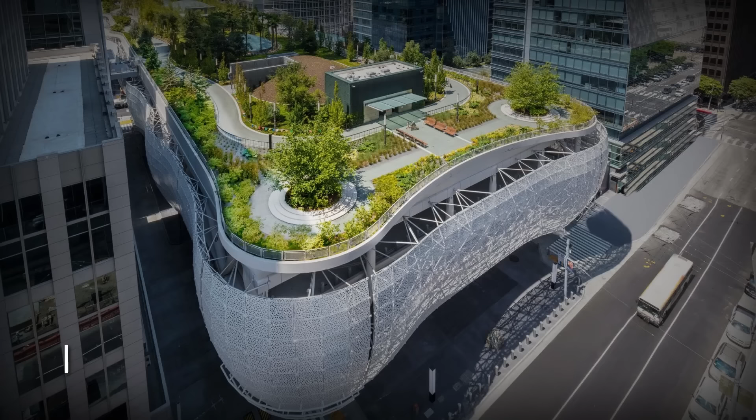The public, through the Transbay Joint Powers Authority, contributed around $30 million of taxpayer money to the settlement, while continuing to deny that the transit center had caused the damage, on the logic that fighting the lawsuits for years would have cost more. The total size of the settlement was kept confidential and is understood to be substantially larger than that public share. And most importantly, the settlement money would fund a fix. The building would be repaired.

And this is where the story turns into something closer to engineering science fiction, because fixing a 645-foot occupied skyscraper that is sinking into reclaimed mud is one of the hardest problems in the discipline.

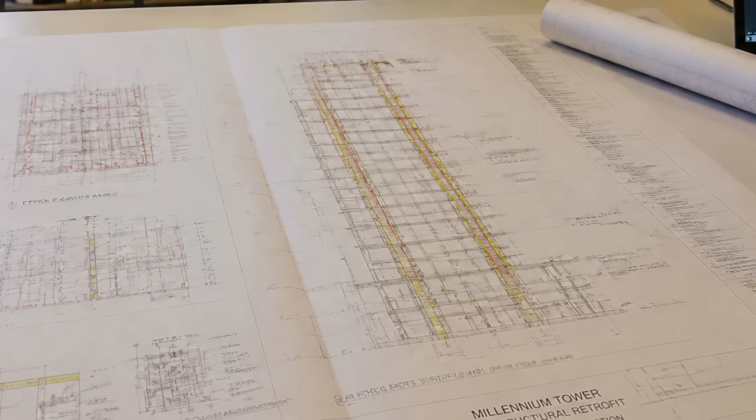The man hired to design the fix was Ronald Hamburger, a senior principal at the firm Simpson, Gumpertz & Heger, and one of the most respected forensic structural engineers in the United States. After September 11, 2001, Hamburger led the structural investigation into the collapse of the World Trade Center towers. If anyone was qualified to save the Millennium Tower, it was him. And his original plan, developed by 2019, was logical.

The problem was that the building's weight was resting on friction piles that were sinking into clay. The solution was to give part of the building new support that did reach bedrock. The plan called for 52 new piles drilled around the perimeter of the building, down roughly 250 feet to bedrock, then structurally tied into the existing foundation so that a portion of the tower's weight could be transferred off the failing friction piles and onto solid rock. The goal was not only to stop the sinking, but to recover some of the tilt by unloading the heavy northwest corner and letting the building slowly settle back toward straight.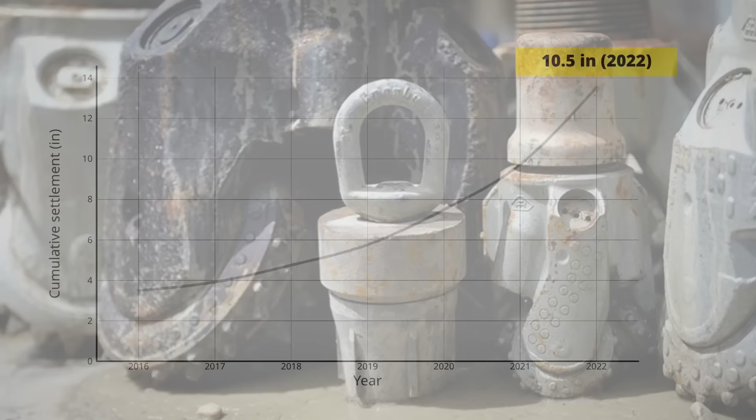Work began in late 2020, and almost immediately, the fix made the problem worse. This is the part of the story that I think is genuinely important and that the celebratory accounts skip. As crews began drilling and excavating to install the new perimeter piles in 2021, the monitoring data showed the building sinking and tilting faster than it had been before the work started. The very act of drilling through the Old Bay clay and the vibration and soil disturbance that came with it was accelerating the consolidation that the project was supposed to stop. The tower leaned nearly 3 more inches to the west during this period.

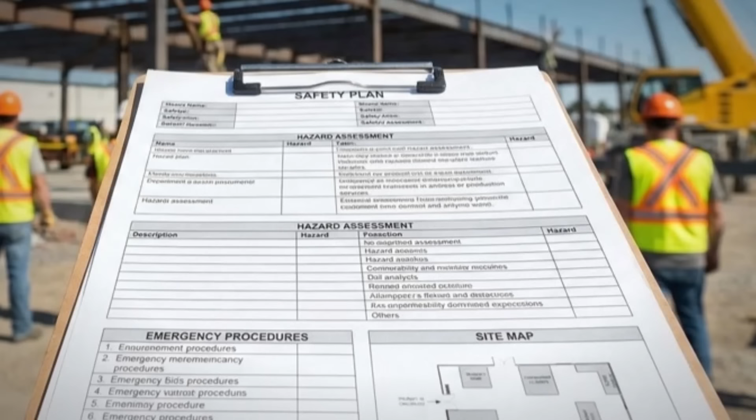Investigators later found that crews had, at one point, left a gap of 1 to 4 days between excavating soil for a pile and injecting the grout meant to stabilize the hole, a delay that went against protocol and that an expert review suggested could help explain the rapid settlement during installation. In August 2021, with the building moving the wrong way, the city ordered the work paused.

I want you to sit with the situation the engineers were now in. They had been hired to fix a sinking, leaning building. Their fix had made it sink and lean faster, and the entire project was under a national microscope, made even more intense because just 2 months earlier, in June 2021, the Champlain Towers South Condominium in Surfside, Florida, had collapsed without warning, killing nearly 100 people.

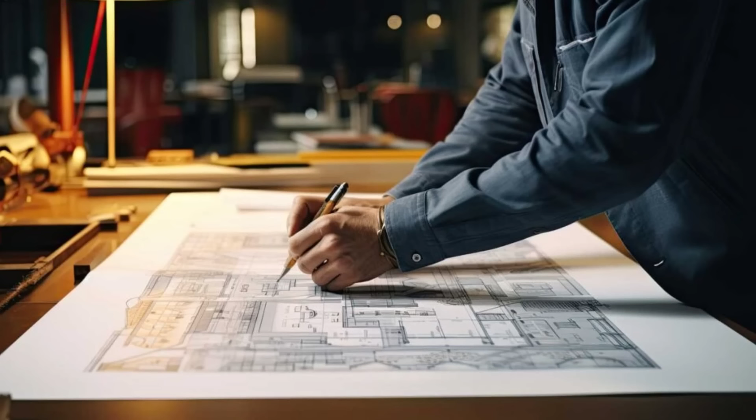I want to be careful here because the Surfside collapse and the Millennium Tower are completely different failures with completely different causes, and nobody has suggested the Millennium Tower is at risk of a Surfside-style collapse. But the timing meant that every regulator, every resident, and every reporter was watching the San Francisco fix with a new and unforgiving intensity. The engineers went back to the drawings, and the redesign they produced was radically smaller.

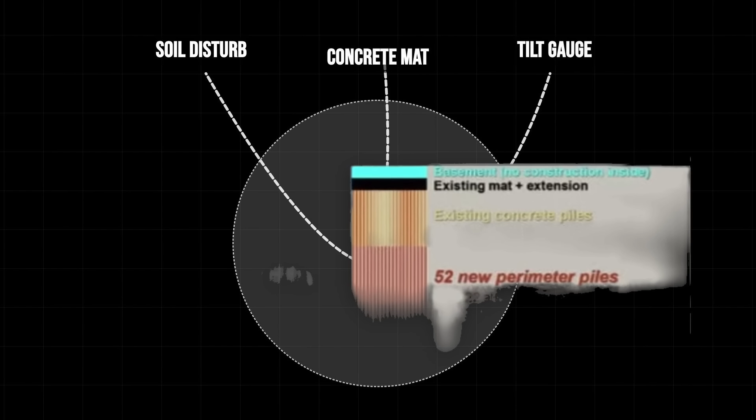Instead of 52 piles around the full perimeter, the revised plan used just 18 piles, already partly installed, concentrated on only 2 sides of the building, 12 along Fremont Street and 6 along Mission Street, the 2 faces toward which the tower was leaning. Fewer piles meant less drilling, less soil disturbance, and less risk of making the lean worse during construction. The piles would go down around 250 feet to bedrock, and a new collar would tie them into the existing concrete mat. The city signed off on the scaled-back plan in 2022.

The engineers argued the 18 piles would accomplish the core objective, arresting the sinking and recovering a portion of the tilt over time. Outside experts questioned the computer models behind that claim, but the work proceeded. The load transfer, the actual process of shifting around 18 million pounds of the building's weight onto the new bedrock piles, was carried out in stages through 2023.

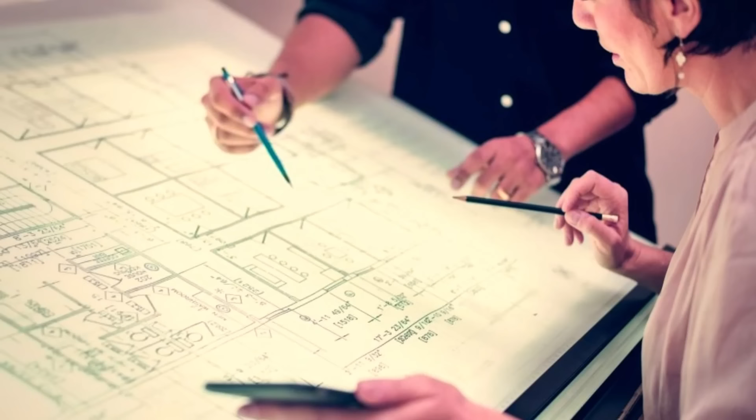And here, the news was genuinely good, at least on the primary objective. By mid-2023, the engineers reported that the settlement had been arrested. The building had, in their words, even risen slightly out of the ground. After 15 years of sinking, the sinking had stopped. On the thing it most needed to do, the fix worked. The tilt was a different story.

Now here is where I have to ask you to keep me honest, and where the careful version of this story diverges sharply from the triumphant one. The engineers' own advanced computer model, the simulation they used to justify the fix and reassure the city and the residents, had forecast that the building would recover as much as 4 inches of its tilt within the first 6 months after the load transfer.

That was the prediction. In the first 9 days, the tower recovered about 3/4 of an inch, and the engineers and the homeowners association celebrated. NBC Bay Area reported the early success. The retrofit later won a Project of the Year award from a National Structural Engineers Association.

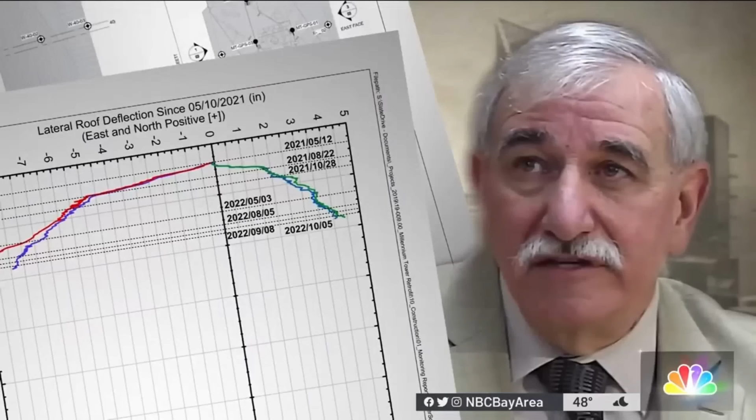But then over the following 2 months, the tilt recovery stalled. And in the time since, the building has recovered only about 1 inch of tilt in total. 1 inch against a predicted 4. 25% of the forecast. The lead engineer's response to this gap was telling. He characterized the tilt recovery as a secondary benefit and said the primary objective had always been to stop the settlement, which it did. That is a defensible position.

The building is no longer sinking, and that is a real achievement, but it is also a quiet redefinition of success. The fix was sold in part on its ability to pull the building back towards straight. It has pulled it back about an inch. The tower still leans roughly 29 inches at the northwest corner.

A foundation engineer named Harry Poulos, reviewing the data, put it plainly. The building had stabilized from the designer's viewpoint, which was their primary objective. But their objective of correcting the tilt to a significant extent had, in his words, not been met. And then came the part that nobody designing the fix appears to have anticipated.

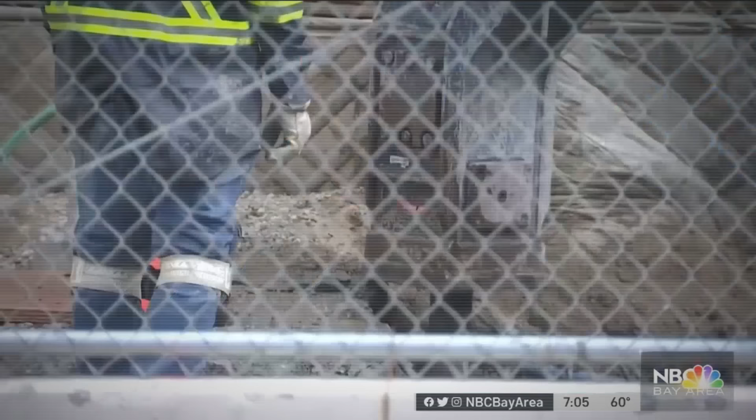As the monitoring continued into 2024, NBC Bay Area's reporting surfaced a new concern: that the center of the building's mat foundation, the part between the original friction piles that is no longer being asked to do the same work now that the perimeter is partly supported on bedrock, appeared to be settling in a different pattern than the edges. The mechanism is still being studied, and I want to be precise that this is an emerging concern, not a confirmed structural failure.

The leading hypothesis raised by longtime critics of the fix is that by strengthening only 2 sides of the building and anchoring the perimeter to bedrock, the load paths shifted in a way that lets the unsupported middle of the foundation keep compressing into the old bay clay underneath. In plain language, the edges are now being held, and the middle may be dishing. After all of it, the tower may no longer be simply tilting. It may be starting to bend.

I personally think that possibility, if it bears out, is the most haunting detail in the entire file, because it would mean that the fix did not just underdeliver on the tilt. It would mean the fix changed the shape of the problem. And I want to be fair, the building remains, by every official assessment, safe and occupied, and the engineers maintain the settlement has been arrested.

The dishing question is something monitoring will answer over years, not something anyone has declared a crisis. But it is exactly the kind of unintended consequence that has defined this building from the day the first marble rolled. Now let me tell you what all of this has cost, because the money is its own story.

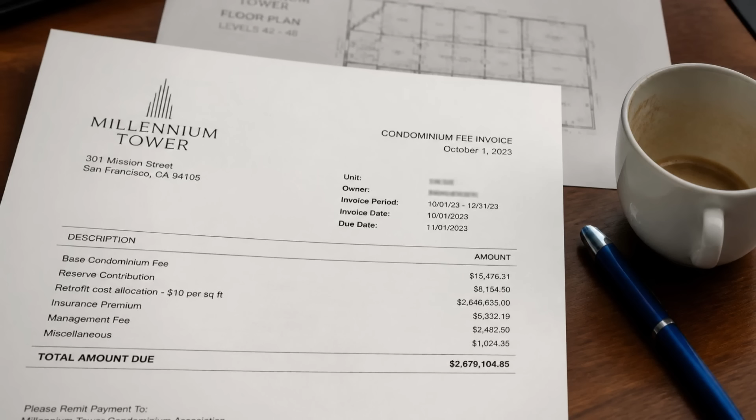The fix was originally budgeted at $100 million. With the pause, the redesign, and the overruns, the actual cost came to around $120 million, on a building that originally cost around $350 million to build. And in 2023, the residents got a bill they did not expect. Out of an estimated $20 million in cost overruns on the retrofit, the homeowners were assessed around $6.8 million, charged at roughly $10 per square foot of condo space, due that October.

People who had already watched the value of their homes collapse, who had already lived through years of news coverage and construction, were now being asked to personally write checks to cover the overruns on a fix for a problem they did not create. And the property values tell the verdict the market reached. The Millennium Tower was once so desirable that owners resold units for 2 and 3 times what they paid, with a penthouse reportedly trading for nearly $10 million.

After 2016, the prices crashed, by some accounts, 30 to 50%. $5 million units traded for $2 to $3 million. Smaller units lost nearly half their value. And even after the fix was declared substantially complete, the discount did not close, because buyers know exactly what they are buying. A 60th floor unit that had once asked around $14 million reportedly sold after the fix for around $9 million. The repair stopped the sinking. It did not repair the reputation, and in real estate, reputation is priced in dollars.

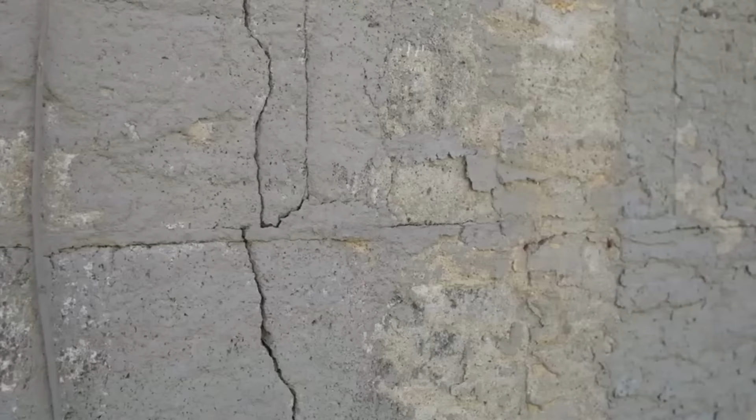So let me bring this back to the question I asked you near the beginning, the one I asked you to hold. When this building failed, whose failure was it? Because now you have the whole picture. You have the engineers who chose friction piles under the assumptions of 2005, a choice that was defensible on paper and catastrophic in practice. You have the developer who wanted a tall building built on a competitive budget and schedule, and who, the city alleged, did not adequately disclose the settlement to buyers. You have the dewatering next door that accelerated a problem that was already underway.

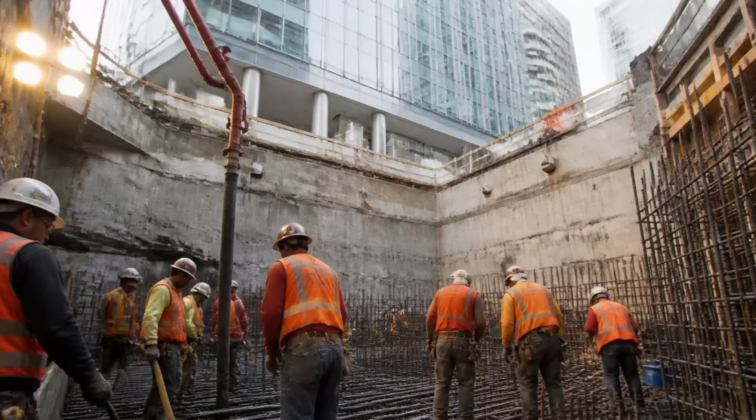You have a regulatory system that allowed a 645-foot concrete tower to be built on reclaimed bay mud without requiring its foundation to reach bedrock the way the towers around it did. And you have a fix, designed by one of the best forensic engineers in the country, that stopped the sinking but recovered only a quarter of the tilt it promised, and may have introduced a new problem in the middle of the foundation. I genuinely want to know where you land now that you have all of it. Was this a failure of individuals or a failure of a system?

And here is the second question, the one I really care about. If you were shopping for a home in San Francisco today, and you could buy a unit in the Millennium Tower at a 40% discount, in a building that is now anchored to bedrock on 2 sides, that the city insists is safe, that has stopped sinking but still leans 29 inches and may be dishing in the middle, would you buy it? At what price does the discount finally outweigh the risk and the reputation? Because somebody eventually has to answer that question for real every time one of those units goes on the market.